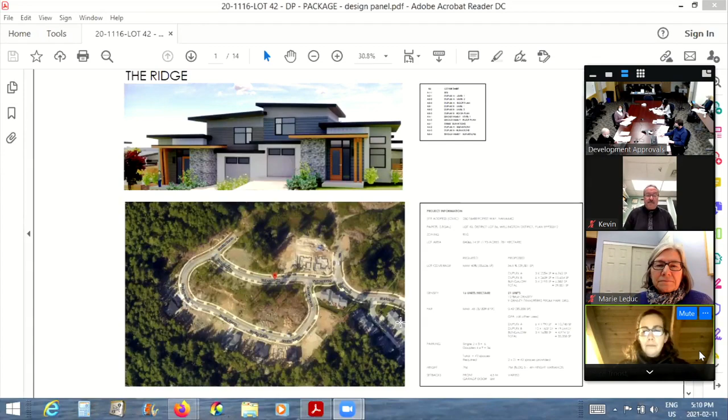So the development consists of 21 total units, 9 duplex buildings, and 3 single-family homes. The intention of the design was to create an upscale development in an existing neighborhood, which is made up of primarily 2-story single-family houses. We designed 2 different duplex housing models to mitigate the different slope conditions on the site.

One is a narrow and deep building that allows light primarily from the front and back, although we do have some windows on the side. But this is to be situated on a site where we have a little bit more depth than, say, the southern part of the site, which is the restrictions of the natural barriers are restricting where we can actually place the house. So we have our kind of lean and skinny model unit here.

And then we have a wide and shallow model. The benefit of the wide and shallow is it allows us to fit, basically to run parallel to this natural feature that runs through the site, and also allows us to have outdoor spaces that aren't set into the hillside, but rather set to the side, allowing for better sun exposure as the sun moves around.

We've used these two models in combination with a single-family house, which we've located on the ends of the site - one here on the end, and then one here and one here. We proposed this as a way to step the development, not only stepping the units to accommodate the hillside and topography, but also the scale or size of the building by using these single-story, single-family units on the end.

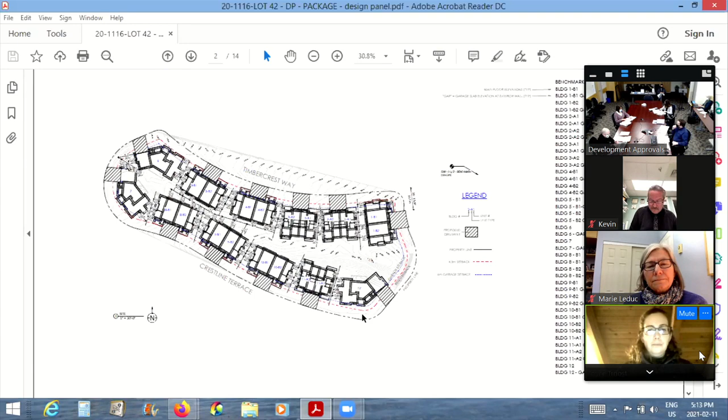So this is a street view here. We've got Crestline and Timbercrest as we come up on the corner. This is our low-high side - our lowest point on the site in general, but this is our low side on Timbercrest. You can see here we start to climb up the road from this point.

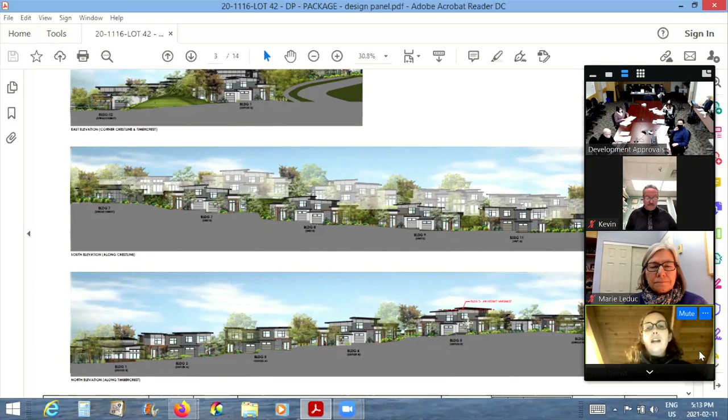This is the elevation, and you can see that what we are constantly trying to do is integrate the townhomes into the slope. Each duplex is stepped in plan as well as stepped along the street. This elevation shows the single family at the top, then comes down showing how we're stepping the different duplex buildings along the road. This elevation shows the low side of the development with the upper units showing behind it, so even those upper units are getting really nice natural light, southern exposure, just based on their placement.

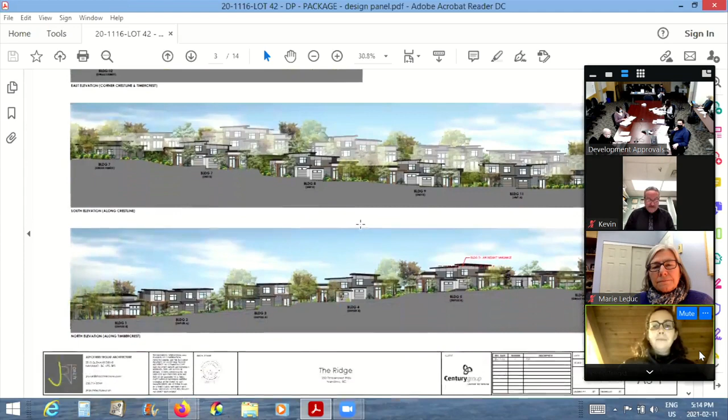In terms of the architecture and elevation, we tried to use a lot of natural materials, integrating and relating to the homes - using stone, muted colors, and also integrating some wood features at the entries as identifying markers for each entry in each of the buildings. While they all have a very similar color palette, we created tonal differences between them to create a cohesive development.

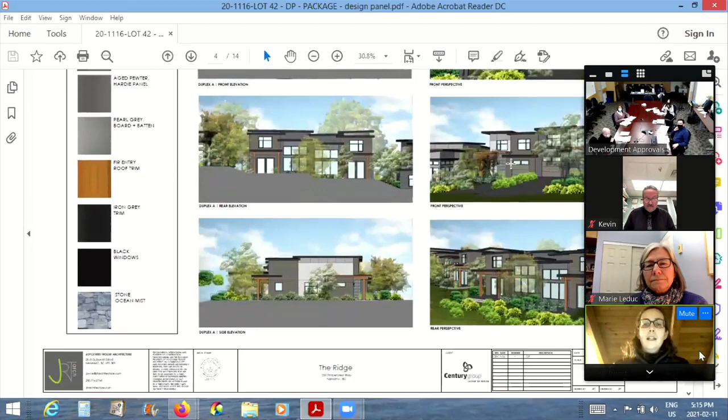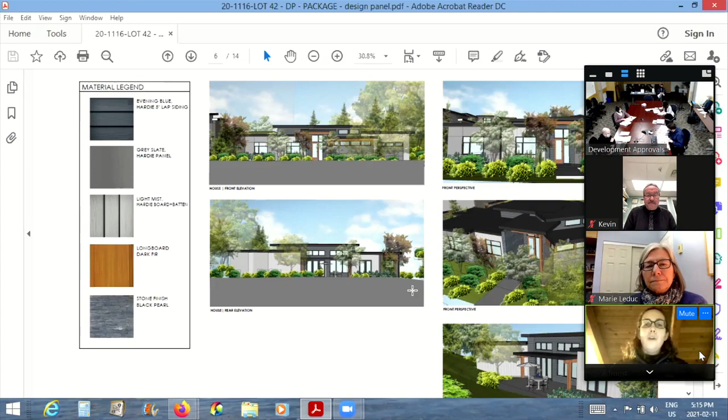This is the long and narrow unit, two-story with a single-story front elevation at the entry. And this is the wide and shallow, where we have a more story-and-a-half scaled living room, dining room, kitchen on the side, giving a bit more visual interest and variety along the elevation. Lastly, we have the single-family house, integrating it with a lot of the design concepts we did with the duplex - the same materials and same tones, to give it that cohesive development.

I think I'm going to turn it over to landscape to address some of the site design. So I will stop sharing. Okay, thanks Joyce. I'll try sharing my screen on this end.

Can you see that's our tree retention plan? Can you see that? Yes. Okay, so yeah, thanks Joyce.

I wanted to start off talking a bit about the site before I talk about the landscape design. As Joyce mentioned, there's a lot of grade change on the site - from left to right it's basically a 10-meter grade change, and from north to south there's 5 meters of grade change between the two roads. So we're not just in one direction, it's pitching in all different ways there.

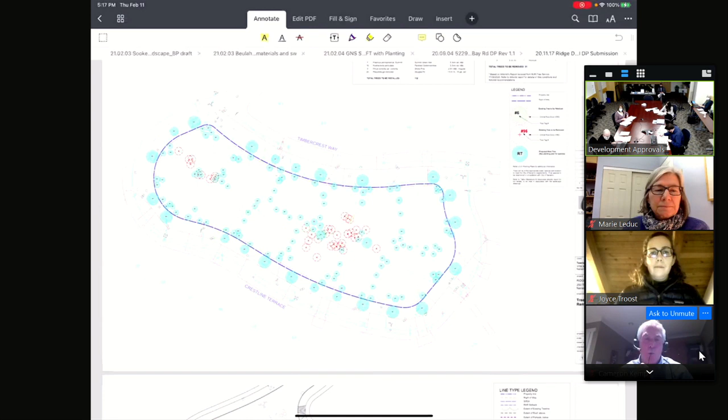You can see the existing trees, those are in red on our plan. We're proposing to remove those, mostly due to the fact that they're on very thin soil on bedrock, and there will be blasting. We're trying to retain a central spine down the middle of the site, but that's just the nature of development and construction. So we're removing 31 trees, but we're proposing to plant - shown in blue - a total of about 132 trees.

The more public landscape consists of native and site-adapted plant material. We're able to create some small lawns where the slope allows it, and we're using concrete for walkways and driveways.

And to manage grades between the units, there's going to be a series of terrace walls to create separation, both vertically but also physically. We've got some screening there as well. In addition, there's the foundation wall of the upper unit, which we're using to our advantage to manage grade as well. We're really trying to minimize the amount of walls that we build and also minimize disturbance to the land as much as possible.

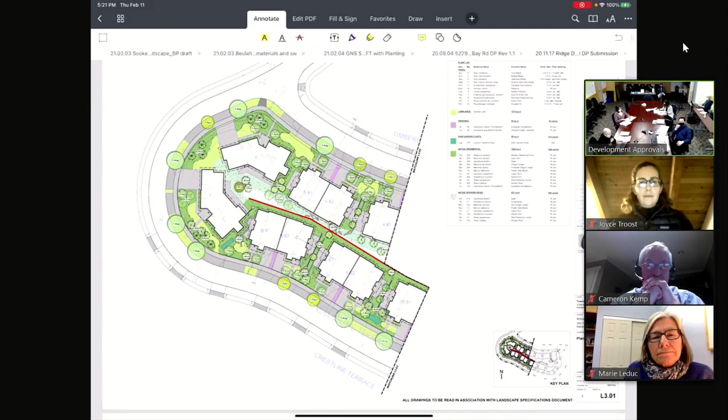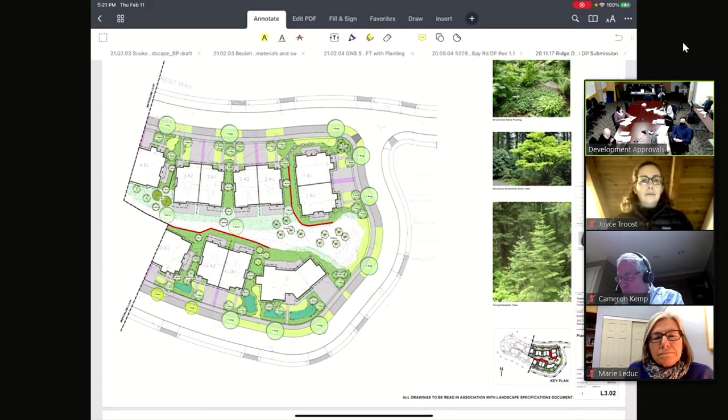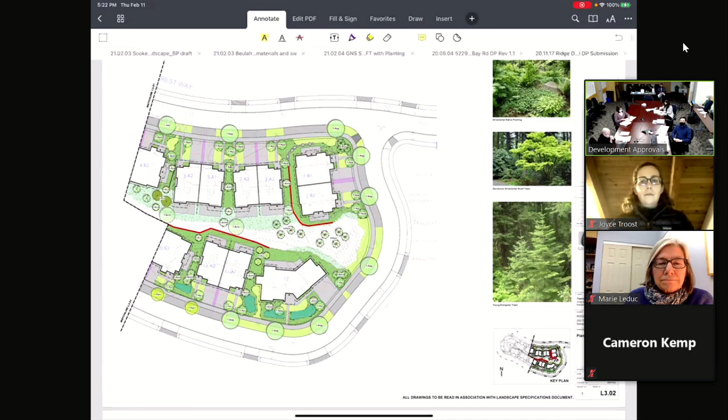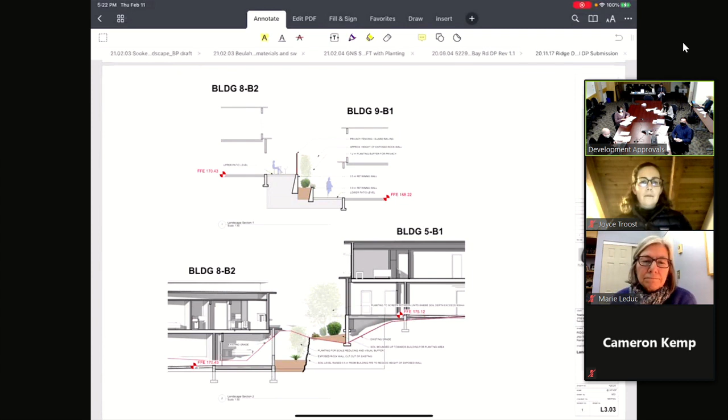And then just a couple of sections. The top section illustrates a typical condition between two units side to side, so you can see the grade change we're dealing with. I think this is probably one of the worst case scenarios we were testing. But you can see we're going to use small retaining walls between units, with a bit of screening on the upper unit and plant material to create physical as well as visual separation between units.

And the lower section is that north-south condition. This is probably the worst case scenario of the two buildings, the backs of the buildings being as close as we can get, showing the cut rock face used as our slope retention, but also showing how the foundation of the upper building can be used as part of the slope design and how we're managing grade on the site. We can actually install soil and get planting in there to create some visual separation from the units as well.

And with that, that's the last of our landscape slides.

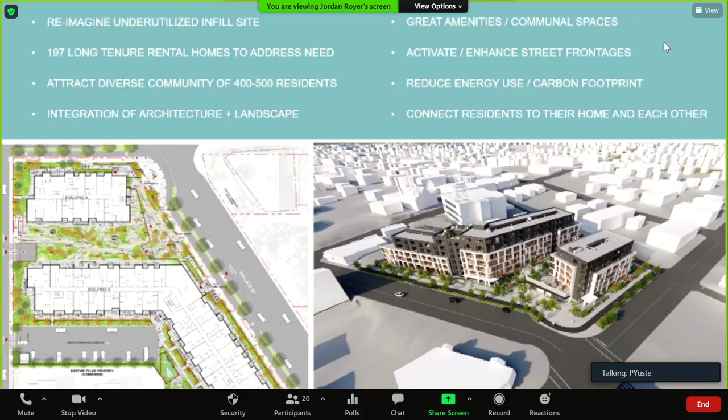Next slide, please. This slide represents our project brief and some of the main ambitions on the project. The site is full of potential - it's an underutilized site. Telus has owned the site for quite some time, and it is home to the operations center that will remain on the property.

We're currently in for subdivision, and the site will be subdivided into three separate sites. The development site, on the left-hand side, occupies about 3/4 of the gross area of the overall property before subdivision, and it will essentially remedy a split zone on the property so we end up with a DT3 zone. Telus really wants to reutilize, reanimate, and revitalize this area of downtown Old City, and in doing so address some of the need with long tenure rental homes.

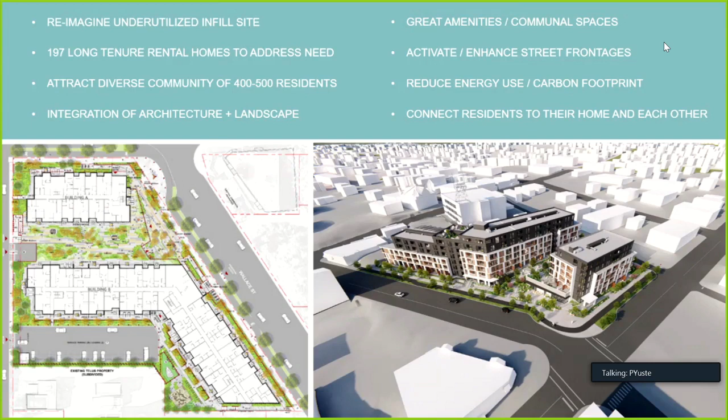Approximately 197 units will be created on the property. There's a desire to attract a diverse community of 400 to 500 residents through the mix of units. We are integrating strong landmark architecture and an extensive landscape architecture strategy, wanting to attract residents through great amenities and communal spaces. At the same time, we have the responsibility to activate and enhance frontages on three sides - Wallace, Wentworth, and Fitzwilliam.

We are committed to reducing our energy use over the long term of the building's life, as well as understanding the initial carbon footprint of the project. Ultimately, a community must be connected to its surroundings, to all the great things happening in this part of the city, as well as to each other. There's some sense of Telus as a technology company allowing us to bring some of those technologies to help connect residents on site into their homes. Next slide, please.

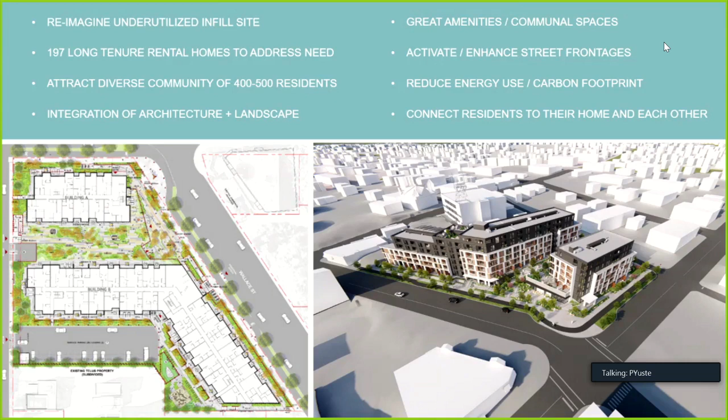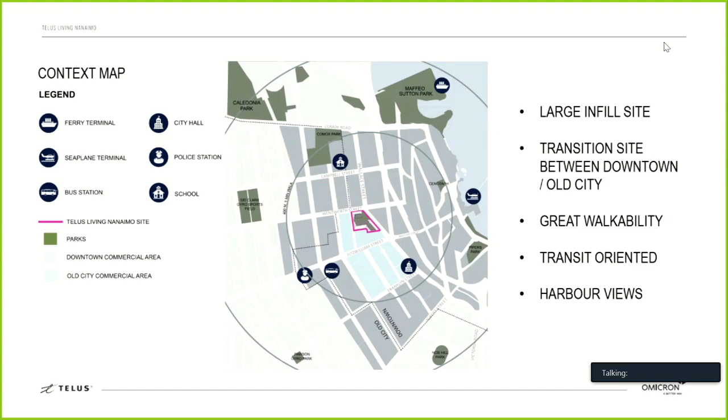As I said, the existing site is underutilized. The 400 Fitzwilliam address corresponds to the existing TELUS CO, which will remain in operation. Total site area of 120,000 square feet. Once we subdivide, we have 71,000 square feet and change for development, essentially oriented to Wallace Street, Wentworth Street, and Richards. We are conforming to the DT3 zoning bylaw.

We are pursuing 2.25 FSR, which is less than the maximum allowable under the DT3 of 2.55. We are looking for a height variance in order to achieve the density that we'd like to achieve on site, and some of the amenities and public benefits on the perimeter. We are conforming essentially to the downtown urban design guidelines in terms of the massing and some of the setbacks and carving of the mass and the articulation of the building.

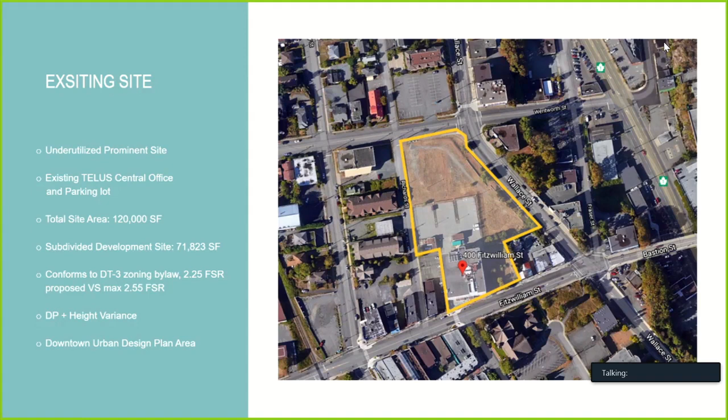This slide really attempts to build the story of how the architecture and the massing of the building, the density, is apportioned on the site. So the first top left-hand corner image is the site itself. If you extrude that area up to the full maximum allowable, you end up with a volume that begins to be carved back to create some opportunities for public realm and integration of landscape at the corner of Wallace and Wentworth. There is a significant grade from Richard Street down to Wallace.

It's about 6.5, 7 meters running down Wentworth. We knew that we needed to allow access to underground parking, in which we have about 100 stalls underground from Richard Street at the high point. So the datum for the build out of the project started at that set point for vehicles, buried partially within the site.

We placed two building volumes, two buildings really: a 6-story building with about 50 units on Wentworth, and a similar 6-story building with some terracing, with about 150 units, which we call Building A and Building B, respectively. Between the two, we've carved out a communal residential courtyard, which sits high off the street relative to Wallace Street, but essentially at Richard Street grade.

With purple, I'm referring now to the image top right-hand side. The purple area, which is essentially the Wallace Street elevation, is where we've created what we're calling the Wallace Terrace, which is a new public space. We'll get into the detail of that with some of the landscape discussion, but essentially it's a public node, kind of a pocket park that sits off the street elevation. It's a couple of steps elevated off of the sidewalk.

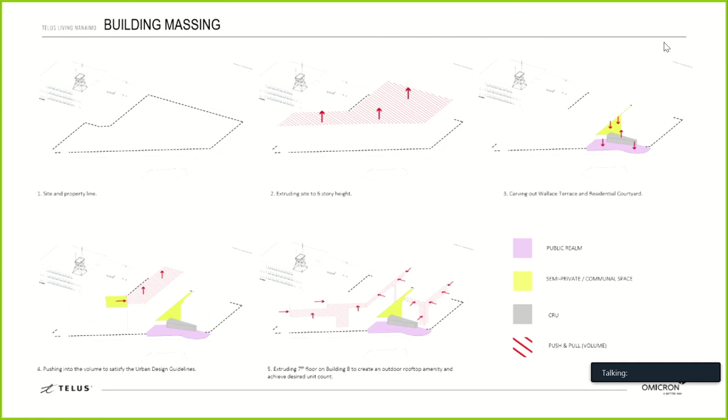Three isometric looking down from Wallace Street, two buildings. One of the things we wanted to make sure we were doing is activating the public space that we're creating at the Wallace Terrace.

This includes the CRU, the outdoor seating, the communal amenity space, which sits here, and this is really a residence lounge, workspace, multi-purpose room. We've also anchored this terrace at both ends with the main building entries for Building A here and Building B here. The communal courtyard is located about 3.5 to 4 meters off of the Wallace Street elevation.

We programmed this space, as well as a roof deck space and some outdoor areas at the back of the building, to compensate for the urban nature of this project. We were trying to make a front yard and a backyard for residents, a place for residents to spend time, with a private to semi-private communal space as you walk away from your units.

Every one of the units in the project has either a patio at grade or balconies, and we've located many of the family-oriented units, 3-beds and 2-beds, at ground plane to take advantage of eyes on the children and eyes on the streets.

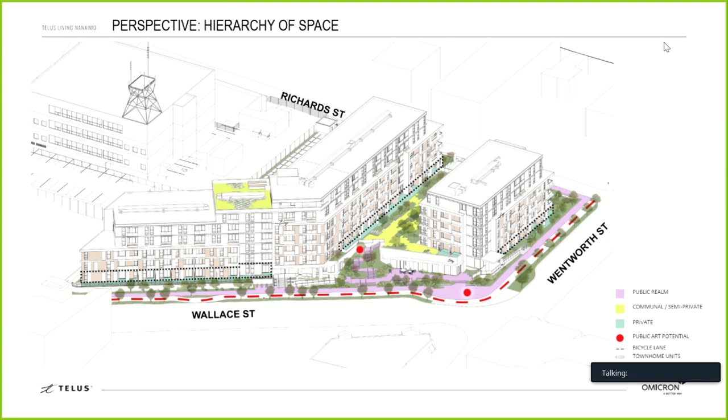As I mentioned, there's quite a unit mix here. We're targeting a wide variety of household types: studios, 1-beds, 1-beds and dens, 2-beds, and 3-beds, ranging from about 425 to 1,200 square feet, plus balcony or patio spaces. We mix the units throughout the project on floor plates so you don't have all of one kind down a hallway—it's a mix of units and a mix of households.

As I mentioned, family units are ground-oriented, and there are some play spaces and active areas for children and families to spend time around the property.

We've also gone to create some adaptable units and accessible units, so the age-in-place opportunity in 15 of the units is taken care of with early thinking, making sure we've created enough space in the units for aging in place to happen, and 4 of the units would be fully accessible on day one.

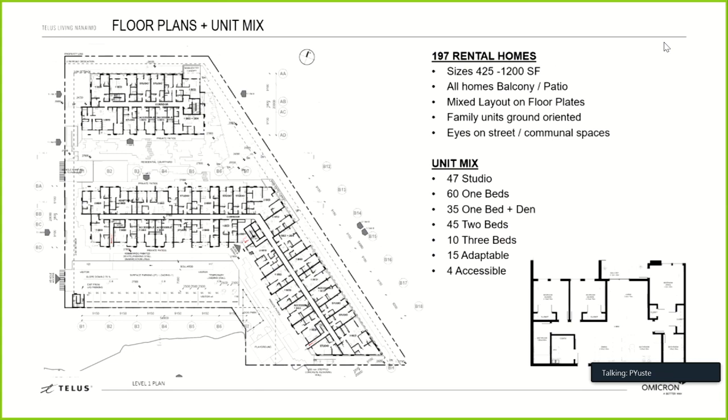In terms of material and color palette, this is a fairly large building, so our strategy was to limit the palette and really dial up the contrast between materials to accentuate and visually reduce the mass of the building. The strategy boils down to choosing a light-colored aluminum composite panel product with the warmth of a wood-like cement or cementitious panel product.

This is used on the 3-4 story white elements which are pushed forward on the building, and then we use a profile metal-clad darker colored material on the back massing, which is the taller part and the more quiet part of the building, having it take a backseat to the activity and randomness of the light panels and openings on balconies on the lower portions.

We've used that at different scales. In some drawings and renderings shown afterward, on Wallace Street as you run south, you get to Victorian Corner, which has those lower historic retail buildings, and the building steps down there to 3 stories, steps back up to 5 stories and 4 stories on the corner at the north.

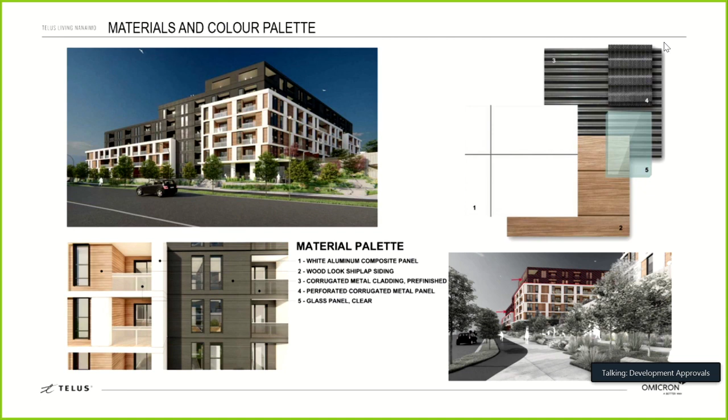Our balcony fronts will be glazed, and we have some of the balconies on the darker upper stories using the same profile cladding, metal cladding laying across the balconies with perforations. Next slide.

This is the shot from Wentworth and Wallace, and we see Building A, the smaller of the 2 buildings, with the building entrance here. There are units at grade that begin to dive slightly under or below the level of the sidewalk as Wentworth rises, and there are patios here.

These households can gain access to the units from the street. We have a similar situation down Wallace Street, where we have units—the main entrance to the building is in the corner, and then we have units that run down the street. There's a relationship to the street here where Wallace is a little bit lower.

We raised the patios of those units about a meter and a half off the street, which provides a nice opportunity for that transition from public to private patio spaces.

This is the CRU and the Wallace Terrace area at the corner, and then you bump out the street standard showing the bicycle lane and turning node. We have the amenity space for residents located here, and there's also a fitness space in the corner for residents to share, along with a rooftop patio, which we'll show a few photos of in the next few slides. Next slide, please.

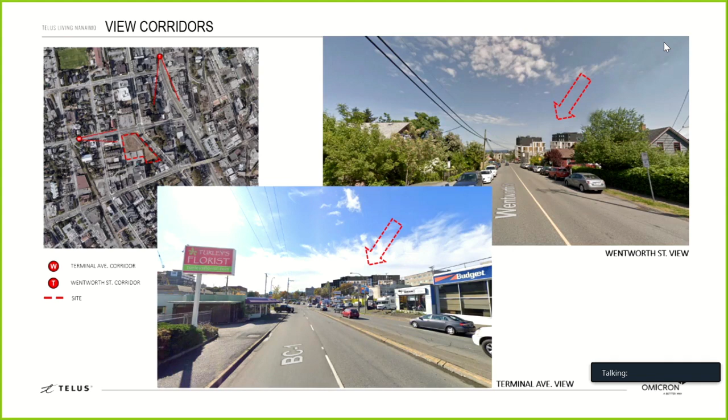Okay, great. We're pretty excited about this project, and we were inspired by so many things, but the key ones were really the spectacular coastal setting, which gave us the launching point for playing up plant life, materials, textures, and tones that resonate with that coastal landscape and the sense of emerging out of the ground, the history of coal mining. We want to play up that place identity and create a resilient landscape that's enduring, fits in with the community, and connects people to nature.

Our two key principles before going into the site plan: we wanted a very dynamic and diverse site program responsive to the unit mix and variety of tenant types. So we have an amazing diversity of spaces, but also some constraints of parking decks — we don't want it to look like a parking deck, we want it to look like landscape coming out of the ground. We don't want to build retaining walls everywhere, so that was the big challenge. We came up with this arrangement almost like planting growing on a rock outcrop — an amazing arrangement of spaces where we played with the topography, the view, and the program to respond to a very dynamic site.

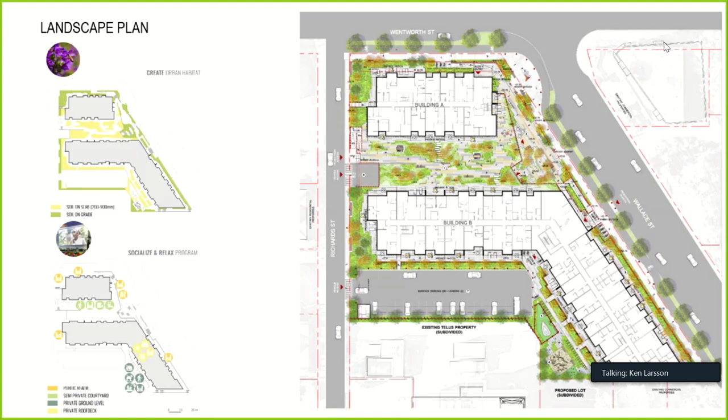The corner for us is a public gem in our mind. It's an activity generator that really activates that street corner with the corner bulge, the bicycle path, the CRU, and a slightly elevated sitting terrace. That's going to be quite the people place. We can imagine food carts rolling up to the curb edge, activity spilling out of the CRU and the fitness center there. There's a lot going on, so we think that's going to be an extremely successful place.

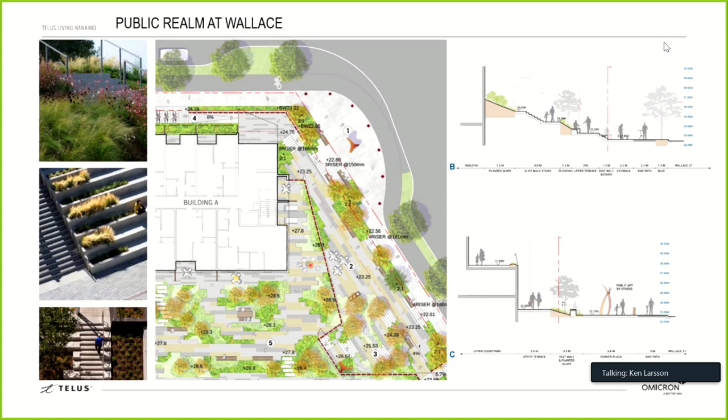You can see in the sections the profile from the street and a slight mid-grade, then the elevation at the upper courtyard deck — so there is quite the grade change there. The last piece is that we want to make sure materials, textures, and colors really resonate with that natural landscape — materials that are enduring and durable, playing off that coastal feel and modern industrial aesthetic of a transformed, dynamic neighborhood in transition. Thank you.

Thank you, Ken. The next number of slides are renderings, and also we have three very short video clips from the modeling — hopefully they stream properly and you're able to see them. It may be that some of these are a little jagged as you see them, but let's go through these images first.

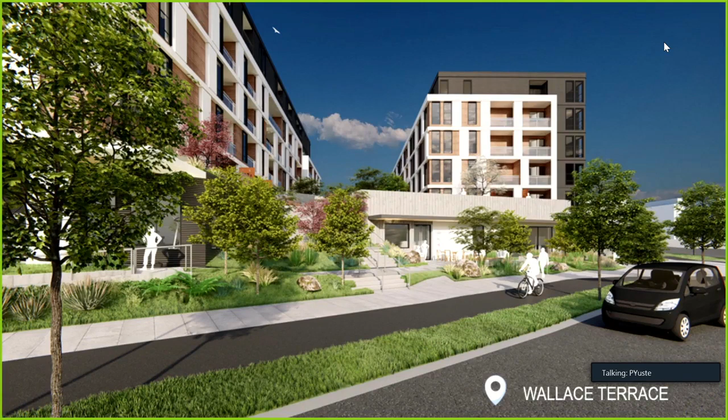This is on Wallace Street, with the corner at Wentworth to your right. This is the Wallace Terrace, a few steps elevated off the sidewalk and a new bike lane. Then you have the communal residential courtyard above, looking over this area.

The CRU is located here with outdoor seating, some hardscape and softscape integrated. This would be the amenity lounge space, a multi-purpose space for the residents, and the fitness room is located here.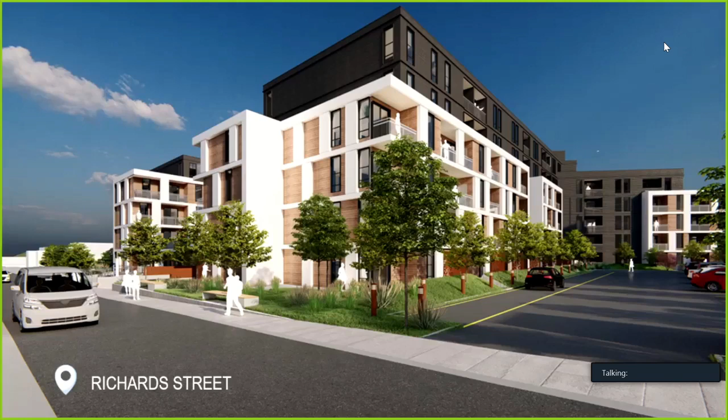This is a shot on Richards Street, looking at Building A and Building B with the courtyard between them visible here. This is the entryway for vehicle access to the underground parking ramp.

Then we have about 20 surface parking stalls here in the loading area at the south-facing end of Building B, and the secondary entrance, or back door to the building, is located at the knuckle, where the building shifts and aligns with Wallace Street.

You can see that we continue to have a relationship and patios and units located at the perimeter, with eyes on the street all the way around the building, and opportunities for residents to access their patio units and garden units without having to go down through the center corridors and internalize the development.

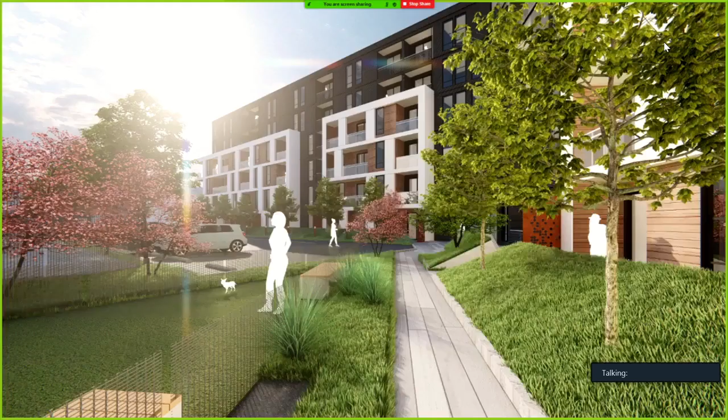This is another shot of the south end of the larger of the two buildings, looking at the knuckle here, which is the second back door entry, and at the back here, which is the most southerly exposed outdoor area in the project. We've placed two communal spaces for amenity: one is a dog walk park, and the other is a children's playground play structure area.

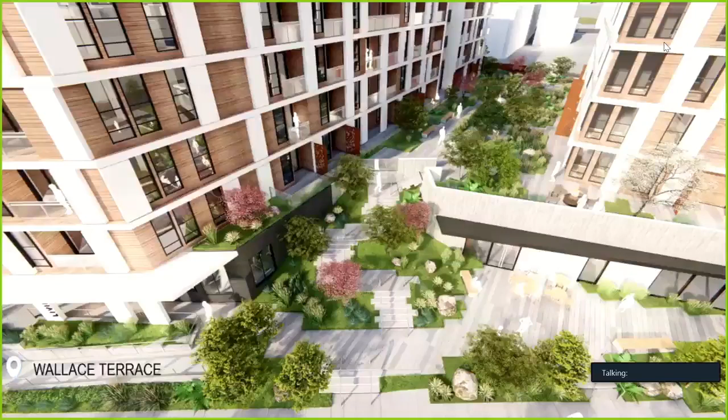This is a shot looking down at the Wallace Street Terrace area, and the courtyard, the central courtyard above that, and the sculptural stair, the CRU here, and the amenity multi-purpose space here.

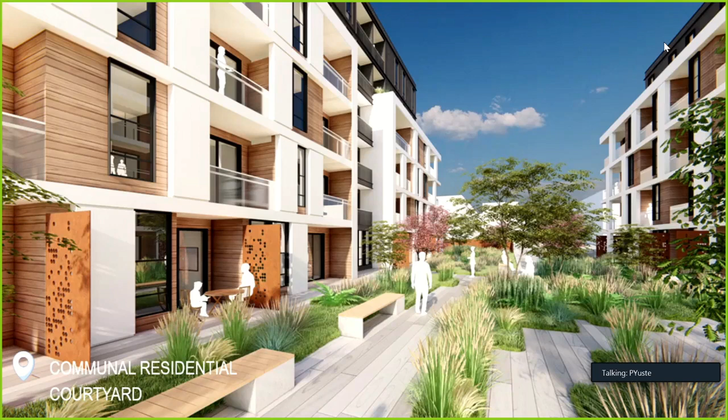And then we transition through landscape and some screening back to the private residential patios at the perimeter on both sides. There's about 13 meters of space from face to face in this corridor, so it's not so large. There's a scale here that is appropriate for a more communal, neighborly feel among residents.

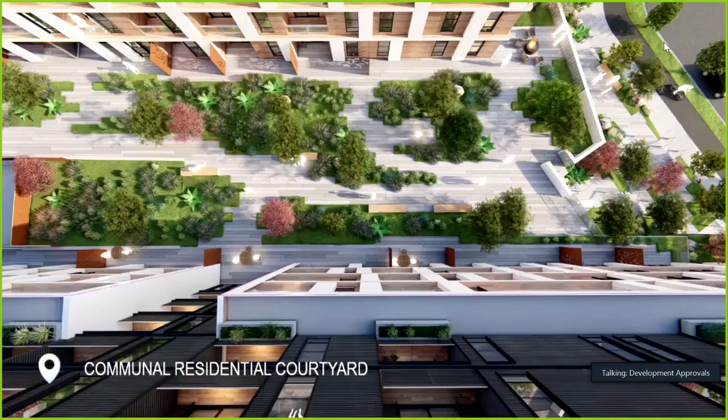Another shot looking down the corridor from above, with Wallace Street to your right and the steps taking you down to the terrace. Some of the patios and upper balconies will also have opportunities for planters in front of them as well.

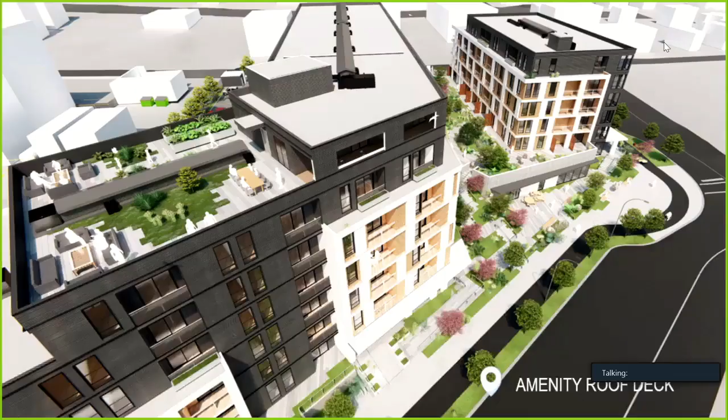A shot again looking down at the complex from above, this time highlighting the communal amenity roof deck for residents. There's a covered area as well as two outdoor areas with opportunities for gardening, outdoor dining, spending time sunbathing if you wish to do that, and workspace as well, both covered.

There's also an indoor amenity space, multi-purpose space with a kitchen and a party room for birthday parties and whatnot, as well as workspace. So both of our multi-purpose rooms have been designed to be very easily convertible to workspace and then back to communal space, whether it's party or meetings.

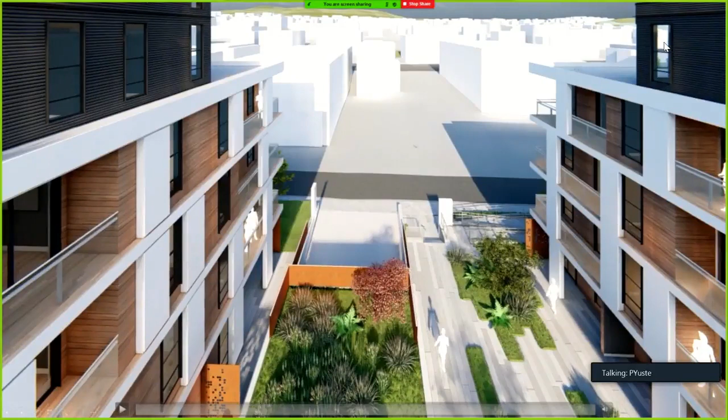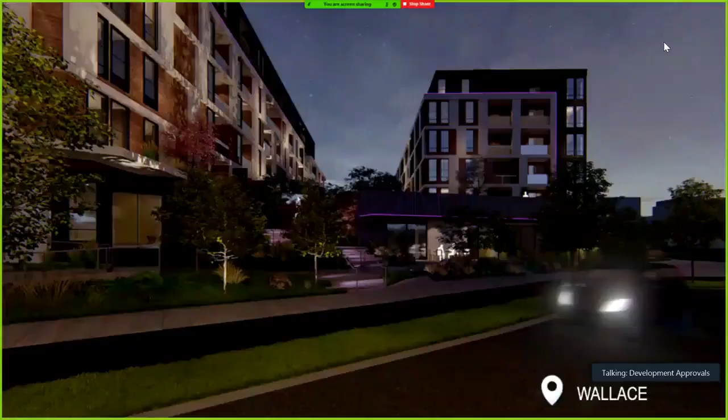And just to finish off on an evening perspective, we have an idea around illuminating the building with LED strips in a fairly subtle way, but one that could bring a bit of excitement and draw some attention to the building forms in the evening and animate the public space on the Wallace Terrace here. Lighting is very difficult to show in renderings, but it's something we're going to spend time on. We'd like to highlight and accentuate the architectural landscape of the project, so that at the frontages certainly we have some drama and some visual interest even as the sun goes down.

That's all we had for our presentation. I hope we didn't take too much time—I was trying to limit it to 15-20 minutes. I'm not sure if we've achieved that or not, but I welcome questions now, please. Thank you.